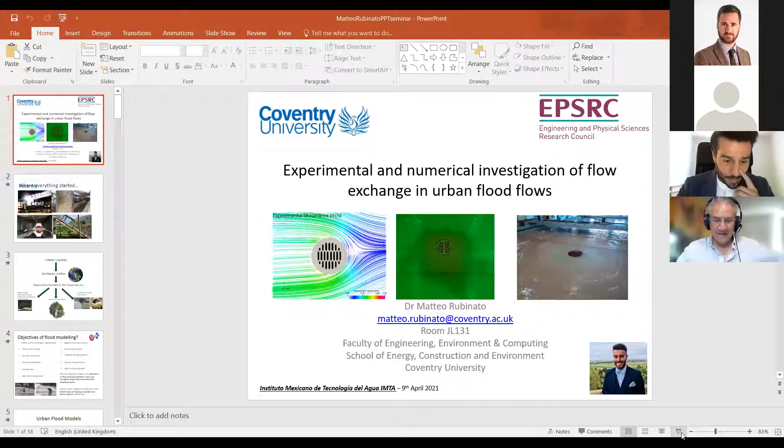Before I start with the presentation, I want to introduce myself and explain why I got this passion to become an environmental experimental modeler. When I was doing my master's studies in Italy at the University of Padova, the topic of my master thesis was building a physical scale model, 1 to 43, of a dam called the Dam of Morelli in Italy.

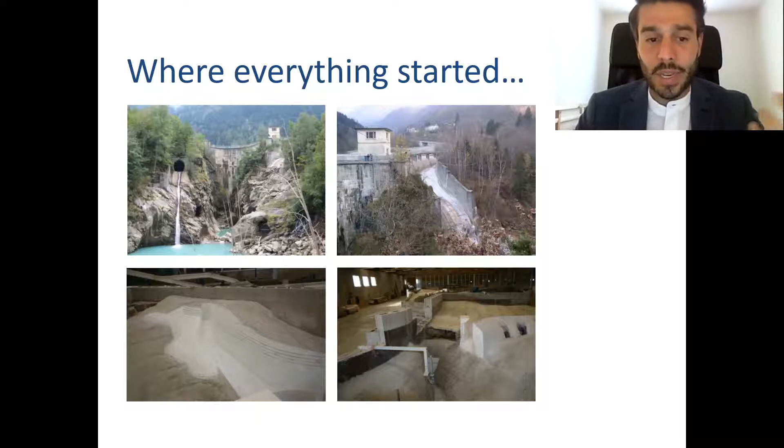There was a need to expand the capability for releasing a higher quantity of water, because sedimentation was happening in the reservoir upstream, limiting the storage capacity. During these years, finishing my master's in Italy, I got to know and work with leaders in Italy at the University of Padova, and that's where I got this passion for experimental modeling. Since then, I was able to continue and grow.

Today I will talk about the topic of urban flooding, shown in the image on the top left, which I'll describe in a few minutes. However, I've also been working on experimental models for river situations, studying the effect pollutants may have when dealing with vegetation on the sides of the river, as well as the debris flow you can see at the bottom right.

These projects are within universities in the UK, mainly Sheffield and Coventry University, as well as universities in China. The bottom left model is from Sichuan University in Chengdu, and the bottom right corner is one I've done in collaboration with a university in Beijing.

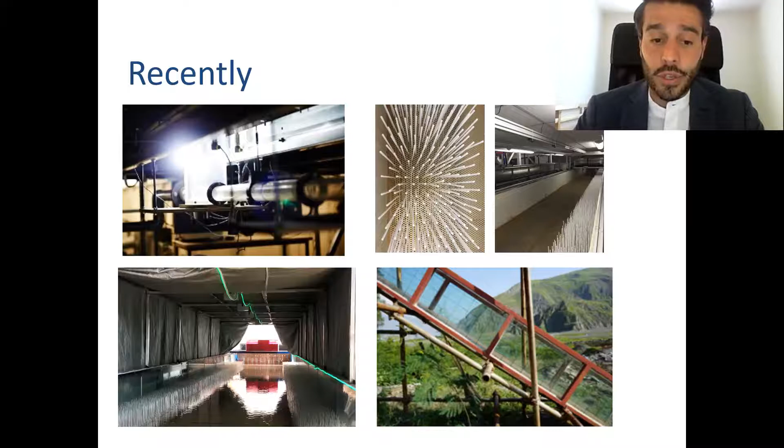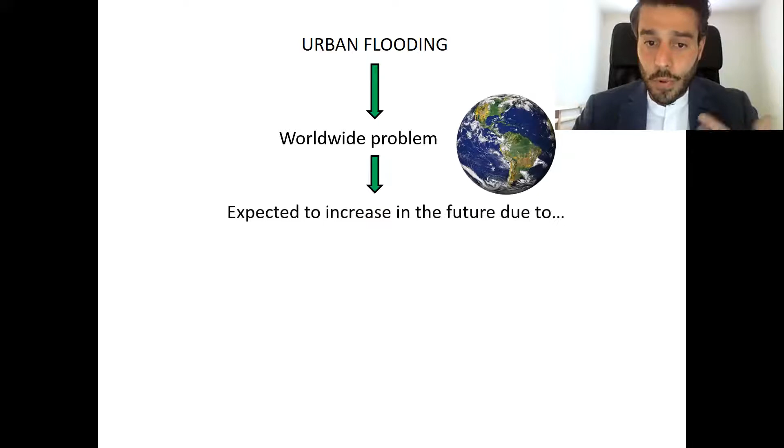So why do I think this is an important topic? Hopefully you will all agree with me. I think this is a worldwide problem, affecting not just a single city in Italy or in the UK, but many cities across the world. What's more important is that we expect this phenomenon to become more frequent in the future. When I talk about more frequent, it's because it can increase in magnitude, and also increase in frequency. This is due to three important aspects, the first being climate change.

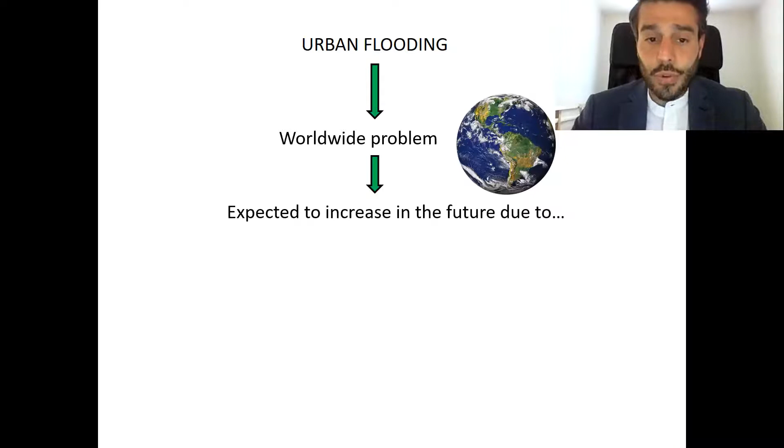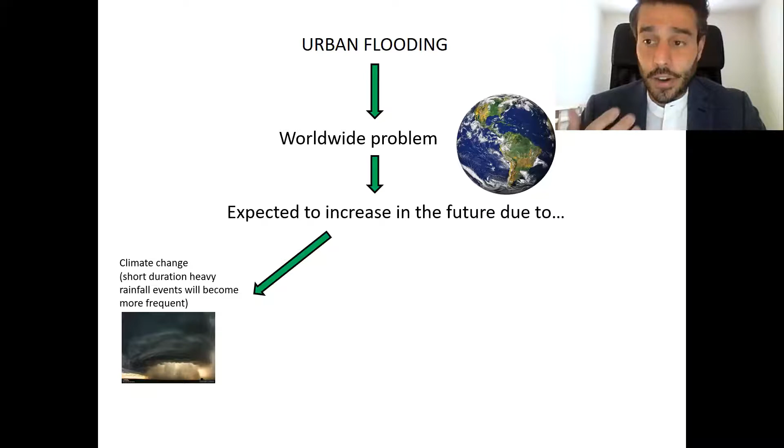We all know there are changes within climates across the world. The most important thing is that in certain areas, heavy rainfall events are becoming more frequent, and therefore they stress the existing sewer system.

The second aspect is the increase of urbanization. This is another phenomenon seeing a lot of people moving from rural areas into urban areas. When we think about that, and about existing sewer systems, we realize they've been designed with a lower capacity of water to be conveyed. With more people moving into cities, the systems are unable to cope with the situation, and therefore can lead to flooding.

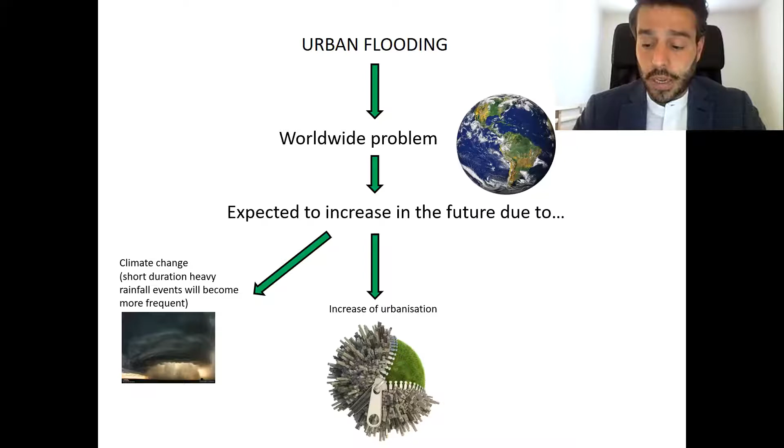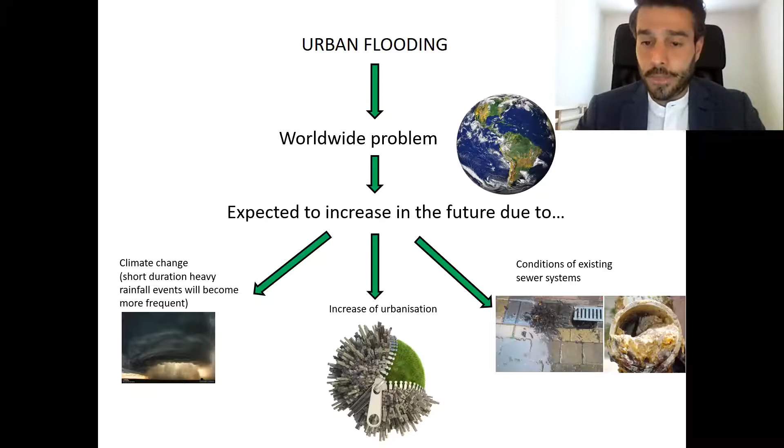When we try to predict urban flooding, engineers nowadays use numerical tools to identify and produce maps that can estimate the level of flooding and which areas are more at risk. This can be for designing new systems, producing hazard maps, systems for real-time management, as well as maps to contact rescue services and direct resources for better management of the situation.

If we look at each of these bullet points, what's very important is that they all deal with the interaction between what happens in the sewers and what happens on the streets. What's very important to state is that, compared to river flooding and coastal flooding, urban flooding is considered the hardest type of flooding to predict and defend against. So we're dealing with a level of uncertainty that is still extremely active today.

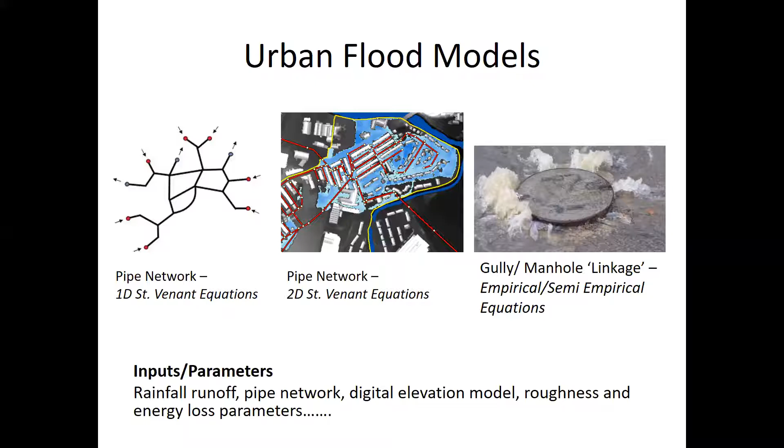Each of these incorporates a level of uncertainty that can lead to accurate or inaccurate results at the end of the simulation. So thinking about this, how can we make sure that whatever we test is extremely accurate? To do that, nowadays the only capability we have is using some resources.

However, due to the development of social media, we can see how many people are taking videos, pictures, or whatever you can think of during these flooding situations. These are often the only images or videos we can use to calibrate and validate our models. However, they're not extremely accurate, so there's still a level of uncertainty with it, and this will not lead to 100% accuracy of what we're trying to achieve.

When we think about all of this, we can imagine straight away that due to the uncertainty of urban flooding events, we do not know when the next event is going to be. And even if we did know, we may not have the resources to develop a system of equipment that can measure everything we need: flow exchange, flow rates in the pipes and on the streets, velocity profiles. All of this leads to a lack of data, a paucity of data, that makes it more difficult to rely on and trust these numerical models.

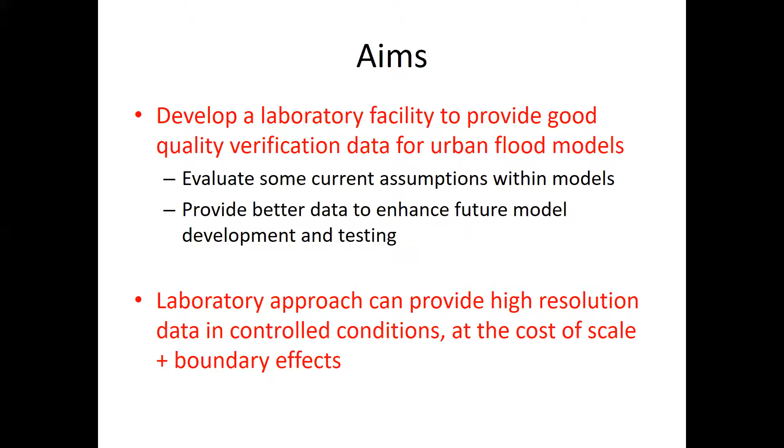And this is also in line with at least the strategies here in the UK. I will be very glad to hear about what the strategy is, for example, in Mexico.

But here, there are three crucial points that are directly in line with this type of research, because the government is trying to provide a better understanding of urban flooding scenarios. And there is a need to provide data that could be used to calibrate and validate numerical models, because they want to improve their accuracy. And all of this is targeting innovation for improving the development of new infrastructure.

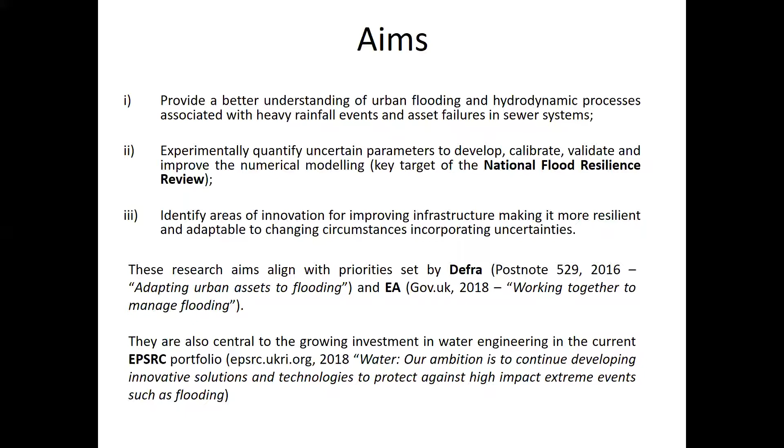And it's also, at the same time, linked with what we call the GCRF Sustainable Development Goals, because for each one of the categories that we have right here, and thinking about what I try to propose with my work, it's actually in line with 3 different Sustainable Development Goals.

So the first one is to try to target developments to build resilient infrastructure, systems that actually lead to a non-flooding scenario, or even to resilient systems that can deal with the flooding scenario. And we want to make cities more sustainable and also safe. And finally, we are definitely targeting the issues of climate change. So these are 3 important criteria that are in line with the research that I'm proposing today, that I'm providing all the results to you.

How did I do that? So I basically designed this experimental facility, which was built from scratch. And as you can see here in the schema, we have a sewer pipe, which is linked to an urban surface, which has a slope of 1 to 1000, via, in this case, a single manhole. This facility can also be expanded up to 6 manholes and 3 different pipes on the drainage.

But to go back to try to provide a better understanding, we had to start from the basic scenario, because you try to understand firstly how a numerical model works on replicating the basic scenario, and then you increase its complexity. As you can see from the model here, you can measure upstream and downstream the flow for the inlet both on the sewer and on the surface, as well as the outflow on the sewer and on the surface.

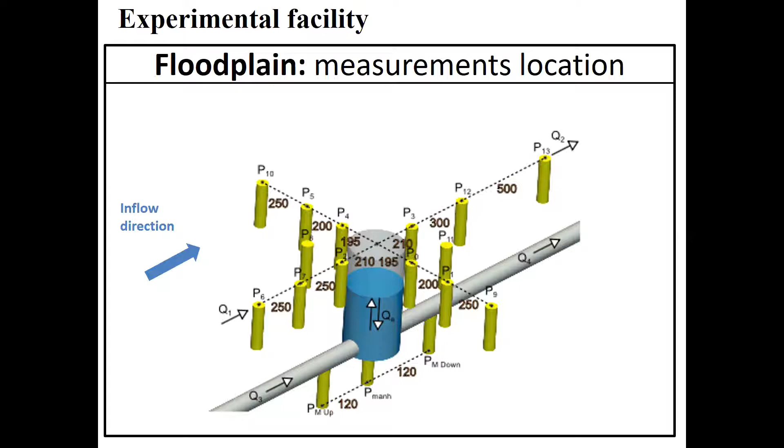We have along the system pressure transducers that I will show now in a second. And there are also a set of measurements on the top of the surface, which actually are very important to determine what is the water level that we have on top of the surface around the manhole when we have the flooding scenario. Here, there are some more images that can give you probably a better understanding about the model.

So the model was made in acrylic, and the choice was made because it is a material that is easy to deal with, to cut, and at the same time, it could enable the visualization of whatever was going inside the manhole. And you can see the example of the flow electromagnetic flow meter in blue, and the valve opening in red.

In this case, this flow electromagnetic flow meter had an accuracy of plus and minus 2.5%. And for the flow measurement, basically we conducted an interpolation between the valve opening and the flow that was generated.

And for the pressure transducers, we used the GEMS sensors, which had an accuracy of plus minus 0.72 millimeters. So we're talking about extremely accurate measurements. And below here, you see a view from the top of the facility, of the surface, which is 4 meters times 8.

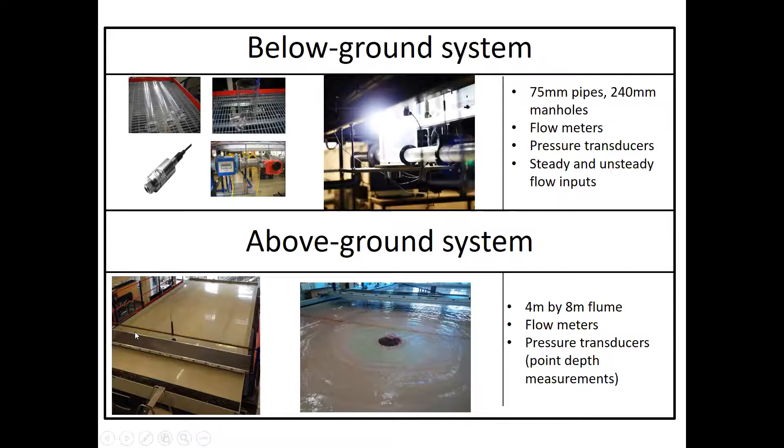At the moment, this is just the image with one manhole overflowing, but as I said, this could be expanded to other six manholes from previous studies, as you can see in my previous publication. When designing this, I needed to make sure everything I designed in terms of equipment could be measured and controlled in real time.

So I basically designed, using equipment provided by LabVIEW, a system of connections that could transform the electrical output of each piece of equipment into a specific value, which could be liters per second for the flow rate or millimeters of water level for the water depth around the manhole.

And this was the interface that I could see when I was doing my test. So I could see in real time the water level around the manhole, the pressure upstream, downstream, and in the manhole itself, the different water levels, and the emergency button for when I was stopping it, when I was flooding the lab, which actually happened a few times at the beginning stage of the test.

This is actually quite important, because when I did the calibration between the valve opening and the flow in liters per second, I wasn't just using a steady condition for my test, because if you think about it, a normal flooding event is actually an extremely unsteady situation.

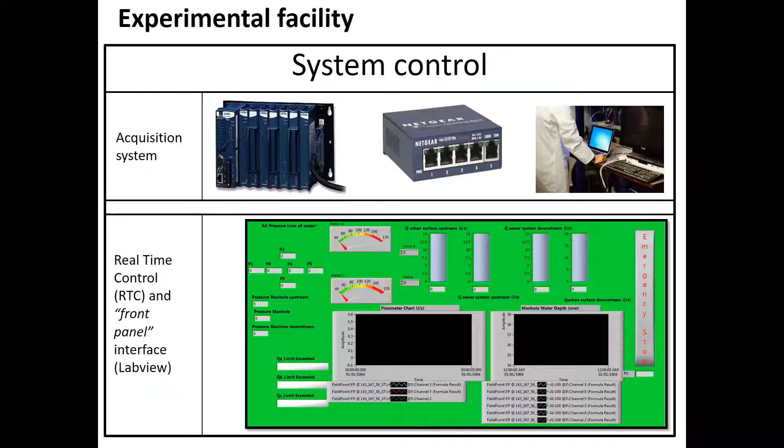So with one of my first publications, I was also able to take specific rainfall events, generate flow hydrographs, and then scale with a direct interpolation, using the same equation but reversing it from liters per second into the valve opening, and then simulating specific hydrographs within the facility itself.

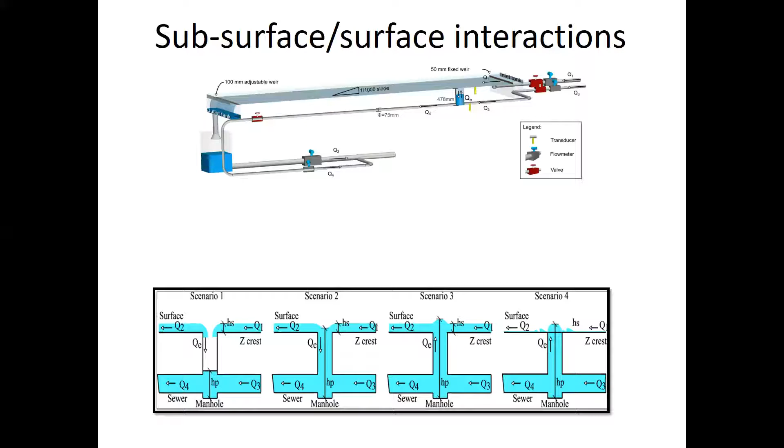In terms of what this facility can do, we have four specific scenarios typical of urban flooding. The first is the inflow into an unsurcharged sewer, which is more often called the free weir case, where water running on the streets enters the sewer, which is not overflowing.

The second is called the submerged case, where inflow again from the street enters the manhole, which in this case is almost starting to come out from the drainage system. And then we have the last two, which are basically situations in which you have an overflow from the drainage system, and you may or may not have a combination of this with water on the streets.

What was very important when I did my literature review was that these equations had never been tested for a specific configuration like this one. They've been taken for different applications, but they were never validated against specific experimental models that could combine the interaction between the two systems.

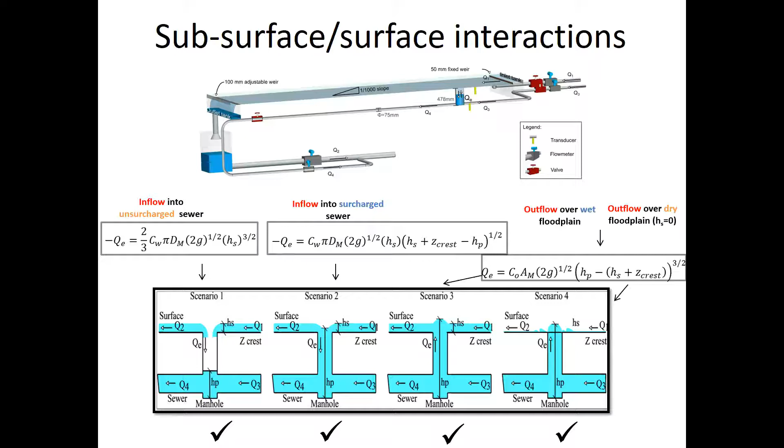As you can see here, some parameters can be expanded with more data attached to the paper, in terms of flow rates and flow exchange. But I always include the non-dimensional Froude number and also the Reynolds number in the pipe, because this gives people the possibility to upscale these results to a different system.

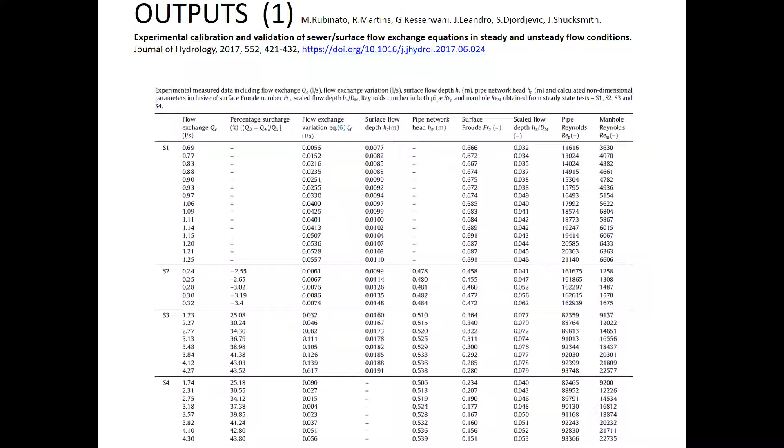Especially when they have a different relationship between water level on the surface and the diameter of the manhole itself. So to verify that validity, I ran a series of tests.

By looking at this equation, I didn't only validate those equations, but I also provided my coefficients in those three equations that I showed before, which can be used by numerical modelers when they insert those equations into their models. So they have a full set of data that they can use to fit those equations and validate the outcomes of their models against my experimental results.

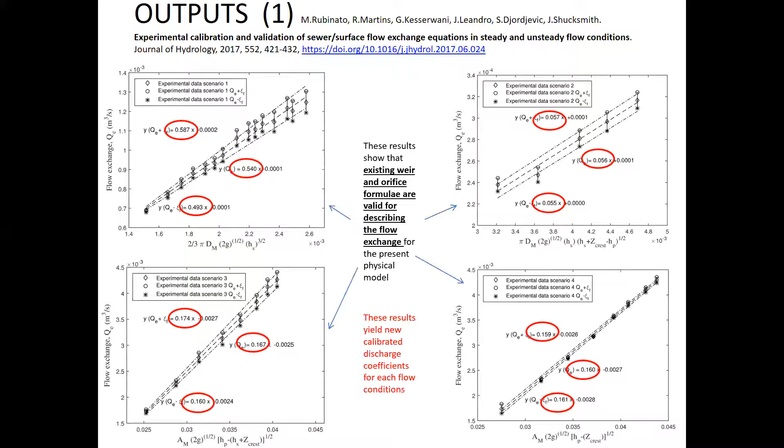So this was the first step. These were all steady tests. So I wanted to see how the model could actually perform if I was running unsteady tests.

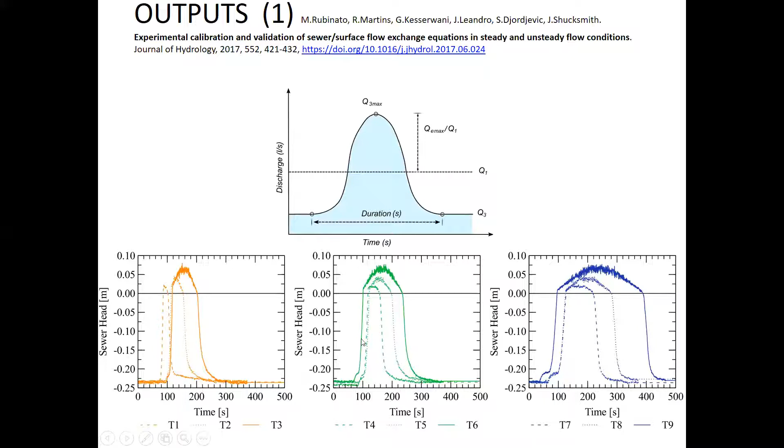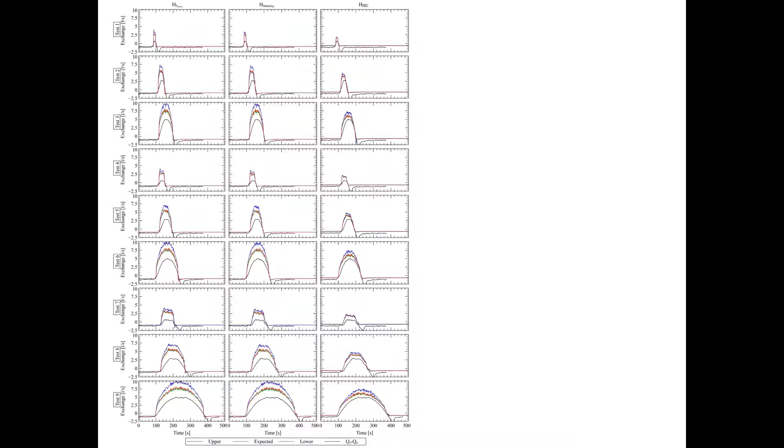As you can see here, I ran a series of tests that were increasing their duration. At the same time, we tested them against different conditions for the numerical modeling, which could use different values, for example, of water level on the surface, or the water level thanks to the equation of Manning, or even the water level using the manhole height. For each of them, as you can see from the graphs, the black ones are experimental, and you can see that every single configuration tends to overestimate the calculation of the flow exchange.

So keep this in mind, this is just one system with one manhole. Try to picture this: if you have to run a full city, how many other manholes there are, and how the level of uncertainty keeps increasing from one to another. So we're talking about producing maps that are actually much more confusing and less accurate than what it could actually be. This is something that I've recently experienced and wanted to expand with further research, and something else is under submission that I couldn't present today.

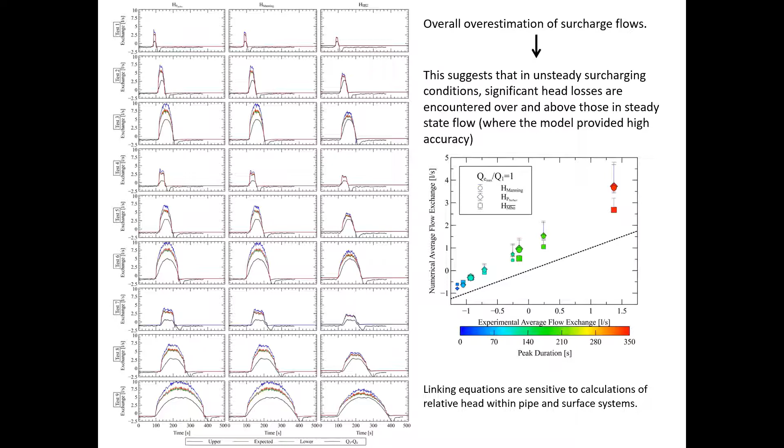The second thing that I wanted to focus on was that all the tests you saw before were made on the worst case scenario, when the manhole lid was removed due to the flooding event. However, this is not always the case, because there are situations in which the lid stays stuck to the manhole.

So when I was traveling around the world for conferences and for my holidays, I was not only taking good pictures of buildings and architecture, but I was focusing as well on different manhole lids. These are actually manhole lids that I took from different countries across the world.

And what I wanted to do was to see how, by changing those equations based on the void area where the water could enter due to the different shape of these manholes, I wanted to see how this could perform, if there was a difference between one and the other.

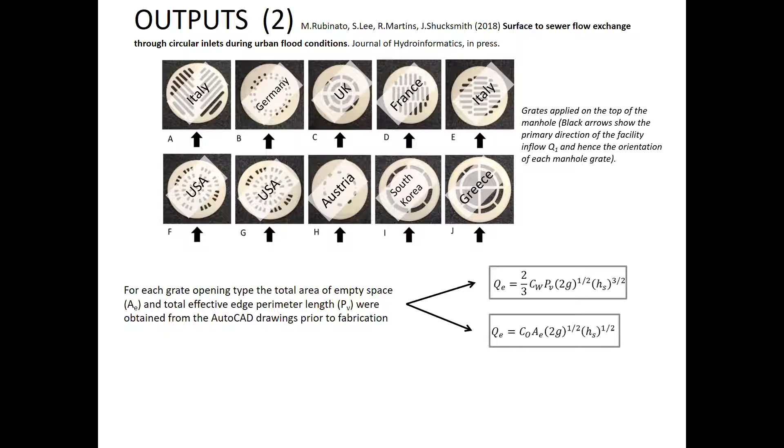So I took again my scenario with all the measurements across, and I was able to identify one point where the water level was not affected by the overflow of the water, or by the fact that when you have the weird scenarios, the water enters the manhole, it was not in a location where the crest was already decreasing. So it was unaffected by it, and it could be the perfect measurement to actually validate these equations.

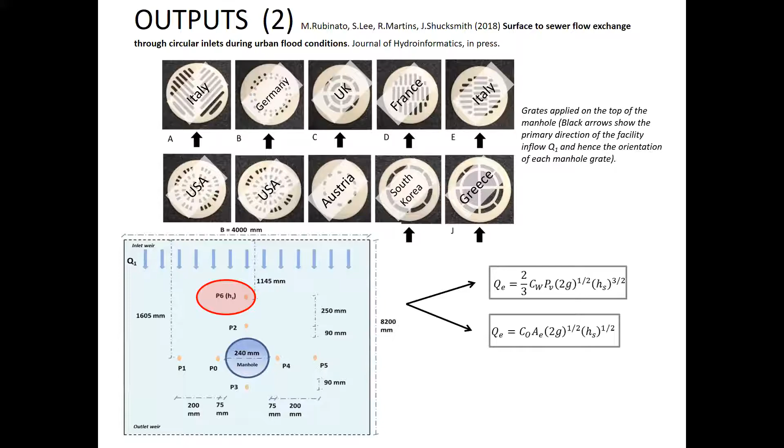You can clearly see already that they all produce a different water level. So upstream, the conditions may have a different water depth, which can alter the amount of flow that is exchanged between the two systems.

After further investigating this, I could find that grate H, which is the one you see in this figure, was the one that was enabling the least flow exchange. Probably this is obvious because you can see it's the one with the least amount of void area. However, the one with not the biggest amount of void area, which is grate A, still enabled a higher flow exchange than all the other cases.

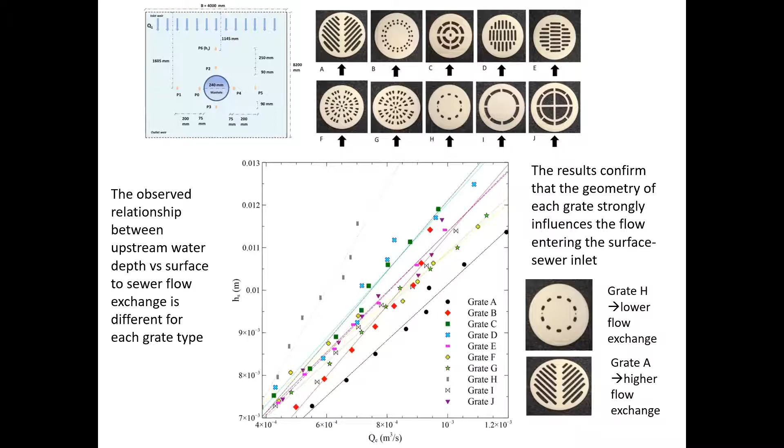This made me think that it doesn't only matter the empty space within the lid, but it actually matters the geometry and how the water is facilitated to enter the manhole itself. This made me think I need to investigate the velocity profile around these lids, because this can justify why I got a higher flow exchange there than in other situations.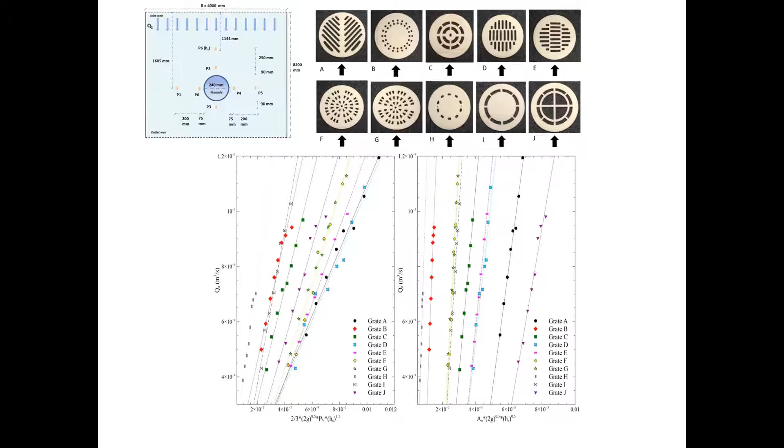When I did this, I also focused on trying to apply those orifice equations you saw before, and they were still validated even with different profiles. So they were still valid, and each of them got a specific set of coefficients.

Another parameter I needed to further investigate, as I mentioned at the beginning, is a part of uncertainty within numerical models related to energy losses. Within my literature review, I found that many people focused on this topic and did a lot of tests.

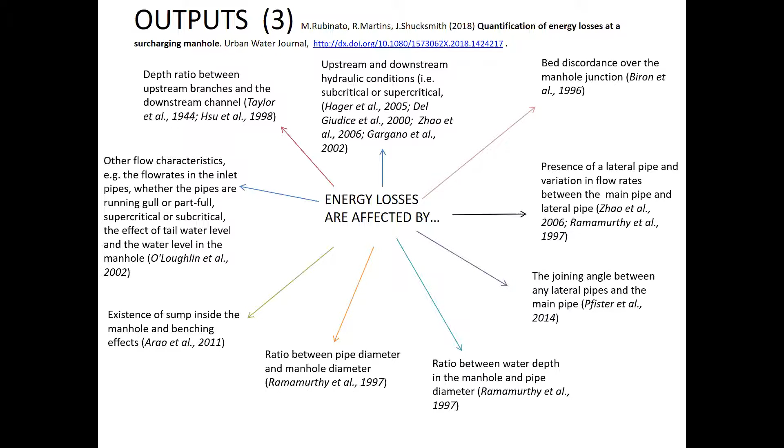They focused on different flow situations, subcritical and supercritical flow. They looked at the different geometry of the manhole versus the pipe, and how the angle joins from the pipe to the manhole itself. These were all extremely important studies.

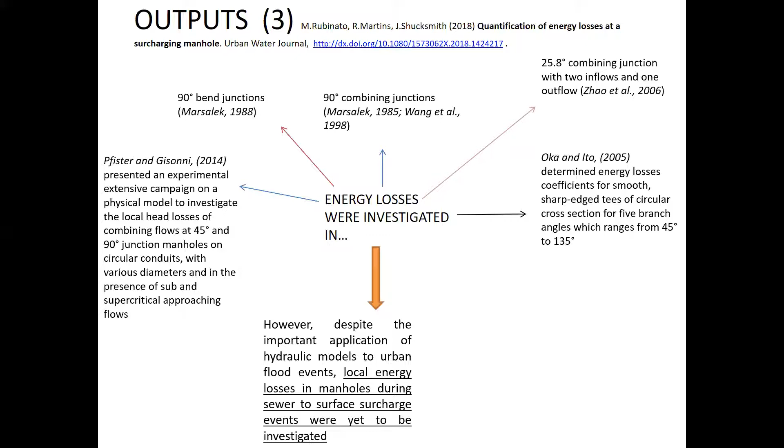However, when we talk about sewers and manholes, we still have a variety of tests that only focused on the sewer system, but none focused on the local losses during a flooding scenario. This was still yet to be investigated when I did this study. Without calibrating this parameter, we can never be sure about the results produced by numerical models.

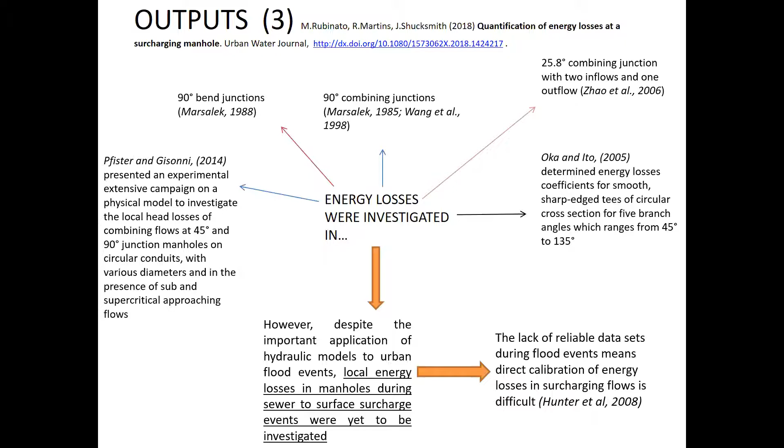So I ran a series of tests to test these conditions and estimate the energy losses for this facility. I introduced a lid which could fully close the manhole, enabling just a small stream of water to come out on the sides, as you'd normally see, and I could measure the pressure upstream and downstream of the manhole.

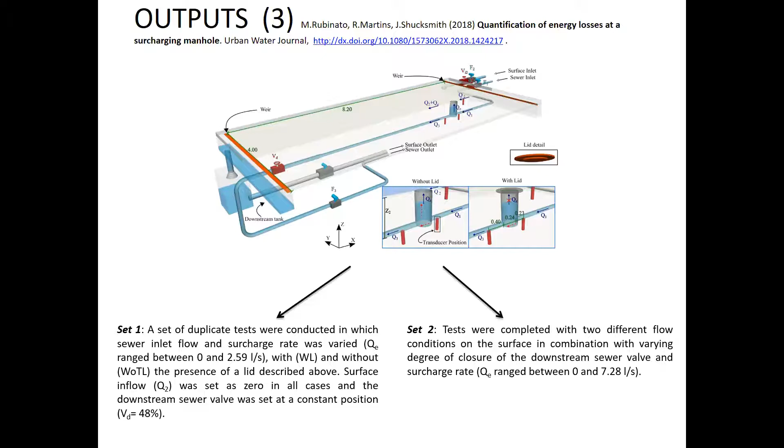I ran two sets of tests. The first was increasing the capacity of the flow exiting the sewer, tested with and without the lid on top of the manhole. The second series replicated an issue in the UK, a blockage in the pipe, and by increasing that blockage, I could see how water coming out would interfere with water running on the street.

To do this, I introduced a new method to estimate energy losses during a flooding scenario. Based on the mass balance between what comes in and what comes out, I focused on two streams: water that exits the manhole and water that follows the pipe. This leads to two energy loss coefficients, one for the exchange and one for what exits the pipe, and I rearranged the equations to find a specific coefficient for each stream.

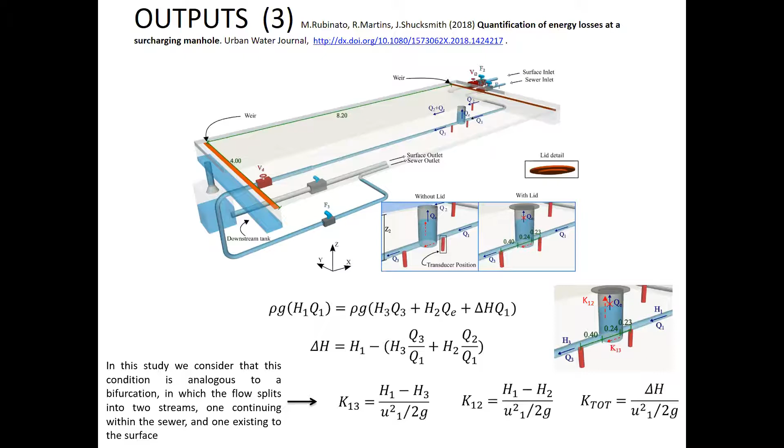When we don't have surcharge, it doesn't matter if we have a lid or not on top of the manhole, and this has proved absolutely fine. However, once we start having surcharge, the configuration without the lid shows a different set of energy losses than the configuration with the lid, which makes sense, because if the water is trapped by the manhole, it creates more turbulence as it tries to push and go out.

If we look just at the stream of water exiting the system, there's clear evidence that the lid has an effect on the energy losses. And when we combine the streams, we expect a scenario similar to that of the water exiting through the pipe.

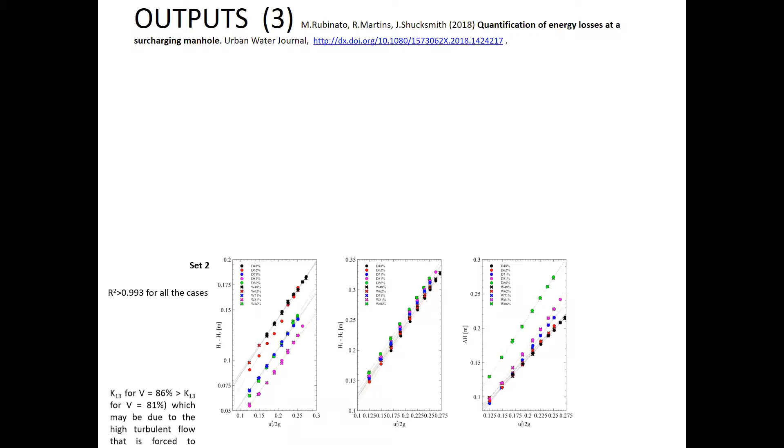For the second case, we blocked the pipe downstream to simulate a different set of pressures. Here again you can see three graphs; the first one follows the pipe.

Then you have the one that exits the manhole, and then you have the overall situation. As you can see on the first one, there is a trend based on the increasing of the blockage, which at some point is actually broken. That means we reach a level of turbulence inside the manhole, and by reaching that point, there is no more linear increase.

So something is so confused inside the manhole, so turbulent, so mixed, that it actually breaks that type of relationship. What's very important is that it doesn't matter how much blockage we have downstream of the pipe, the energy loss associated with what exits the manhole doesn't have any specific modification based on the amount of water on the surface. As you can see, we have a range of linear interpolations that are very similar and within a close range.

So this is actually something that, if taken into consideration in advance, can reduce the uncertainty.

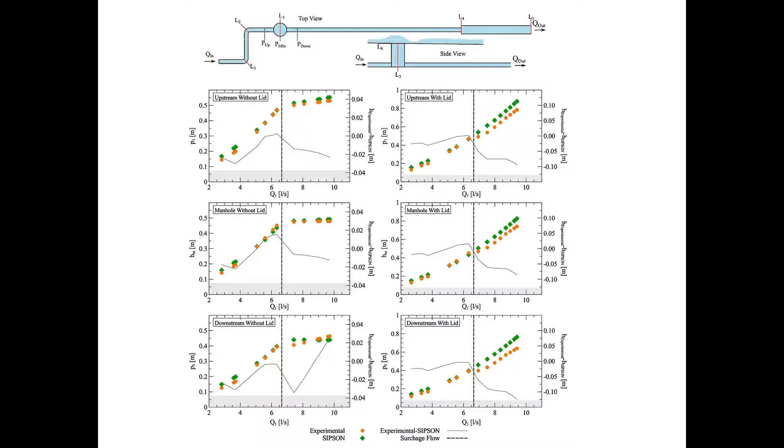We start seeing, however, a different situation when we focus on the overflow scenario. Especially when we have a lid, which is a typical scenario we'd expect, this leads to an uncertainty that was once again demonstrated to be present in numerical models. So with all my studies, I continue to show what needed to be taken into account and what could lead to more accurate results in the future.

This is another study where I focused on how well the numerical models replicated the flow exiting the manhole. These are all screenshots where we increased the ratio between what was coming out of the sewer and the flow on the surface, and the red dots are where the measurements were taken.

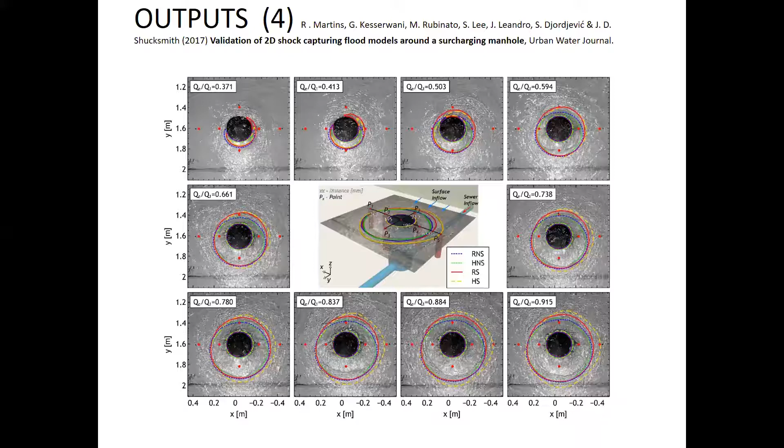You can see how we start from a crescent moon shape of the area of transition from supercritical to subcritical flow within the manhole, and now we almost arrive at a fully developed circle, which can be similar to almost a quadratic shape based on the assumptions we had with the numerical models.

This is just a visualization, but also in terms of results, you can see there are still some limitations based on assumptions about how the pressure, especially upstream and downstream of the manhole, could be present in the numerical models.

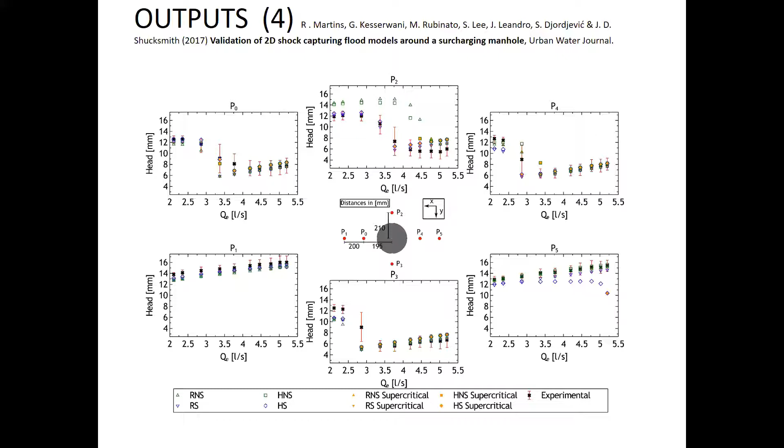And this is important because these are the parameters we would use to estimate the exchange between the two systems. Once I did all these tests, everything I talked about so far was based on focusing on the flow conditions and on the hydraulics of it. However, if you go back a few minutes, you remember I said I wanted to focus on what was happening in terms of velocity conditions.

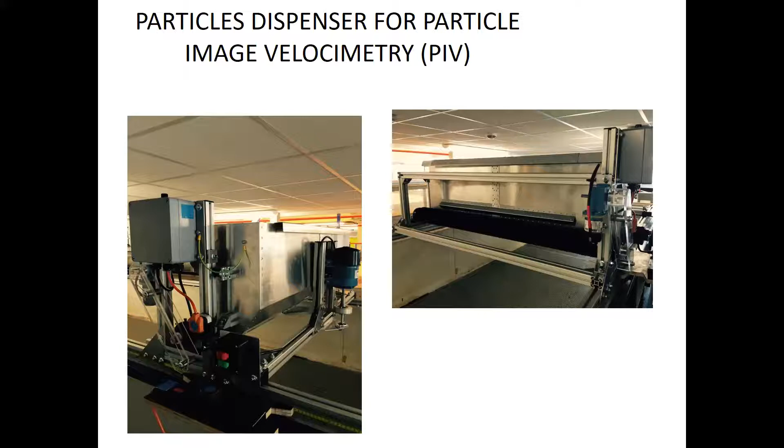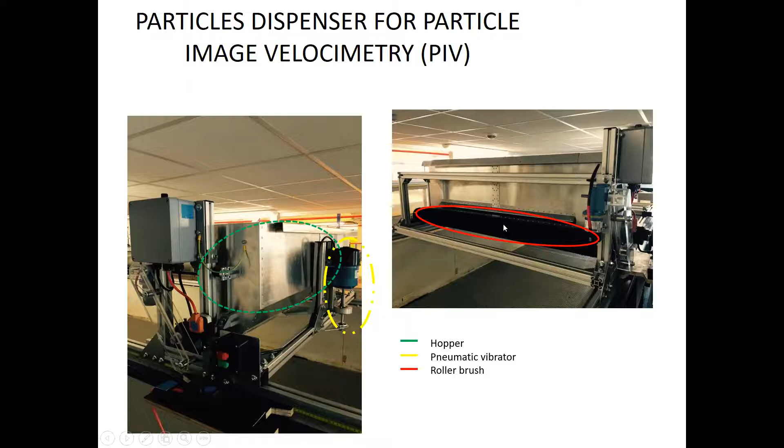So I designed this system. This is basically a particle dispenser. There is a hopper here, and it contains PVC particles, and this pneumatic vibrator basically shakes the box. So the particles move towards the bottom side, and this roller brush releases them into the system, as you can see here, released steadily within the system.

And then, of course, I had to design a system to collect the particles before they were recycled. I did this so I could develop a system of cameras which could record in real time all the videos I was making, enabling me to analyze step by step each movement of the particles from frame to frame to design the velocity field.

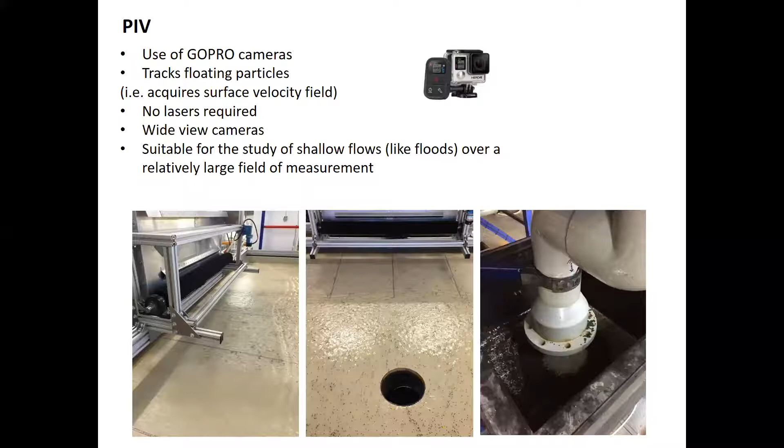I used GoPro cameras because you don't always have huge availability of resources for research, and they have demonstrated to be actually very good. So I need to calibrate them because they have a fisheye effect.

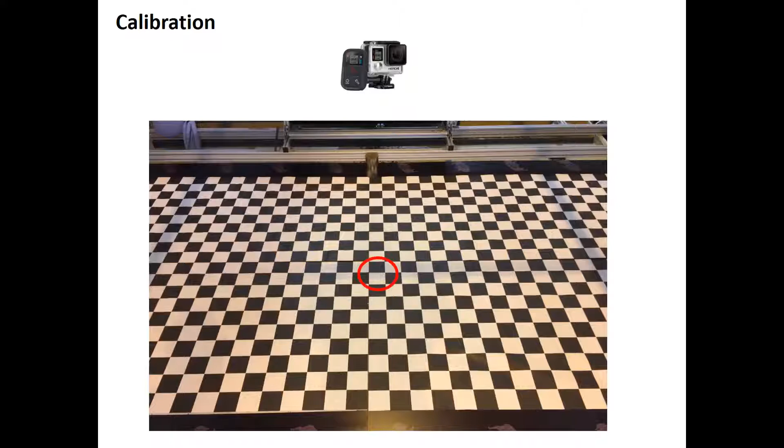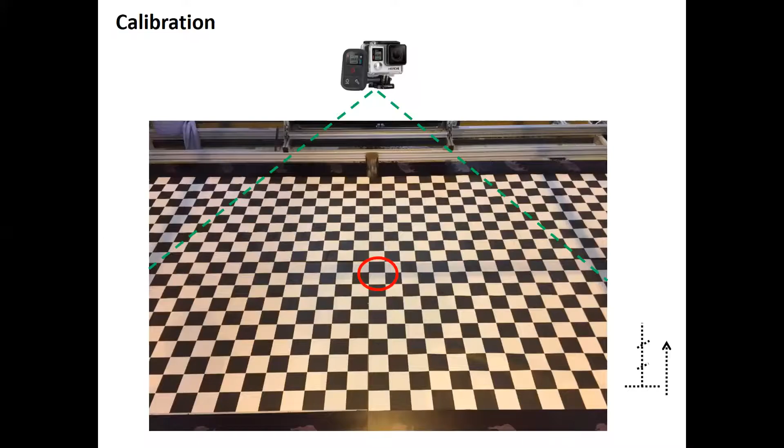So I use this checkerboard here at the bottom. And once I have a full view of the system, I have to repeat this from water level to water level. This is the image that a normal GoPro camera will give you, and you can see this fisheye effect with the curvature on the side.

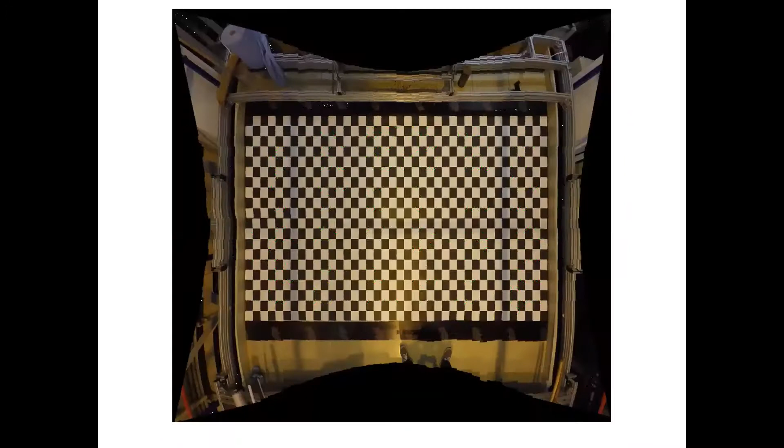However, by implementing some algorithm with a MATLAB function, I could dewarp the image and then crop it to make exactly the same platform as if it was straight in front of me, without any curvature.

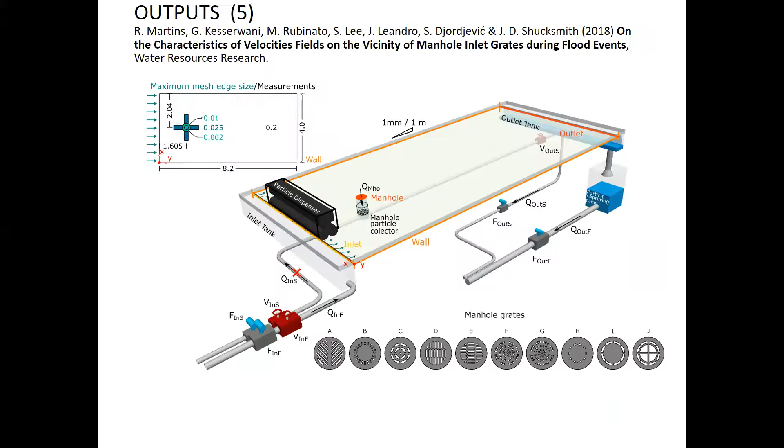Once I did that and designed the system to collect this data, I tested all the lids again, and I was able to not only verify experimentally and numerically the quantification of flow exchange, but also produce, for each of the lids, a full set of maps for the velocity field around it.

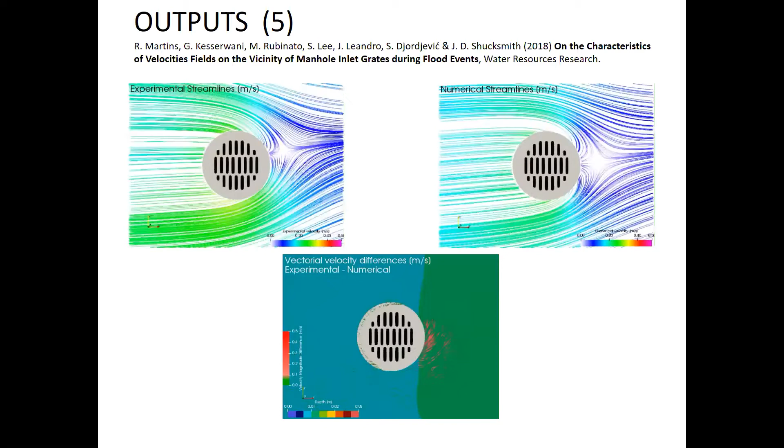This helped us justify why the water was entering more easily for specific manhole lids than others. This data is shared in another journal paper that is mentioned above here.

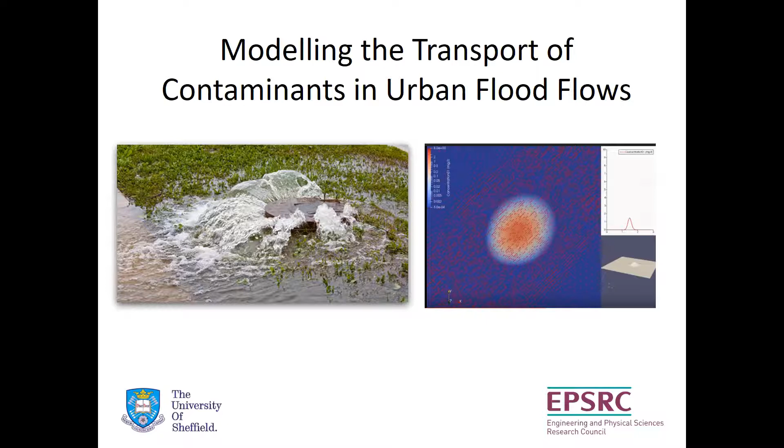After all of this, I wanted to keep building on the results of this facility, and move into a topic that so far not many people have actually tried to deal with: the modeling of the transport of contaminants in urban flood flows.

When we talk about this, of course, I found literature review mentioning this issue, and plenty of newspapers that were actually referring to it.

But what actually gave me the inspiration was when I went to a conference, the ICUD in Prague in 2017, and one of the keynote speakers talked about this issue, because there was a need for calibrating and validating models also for pollutant transport.

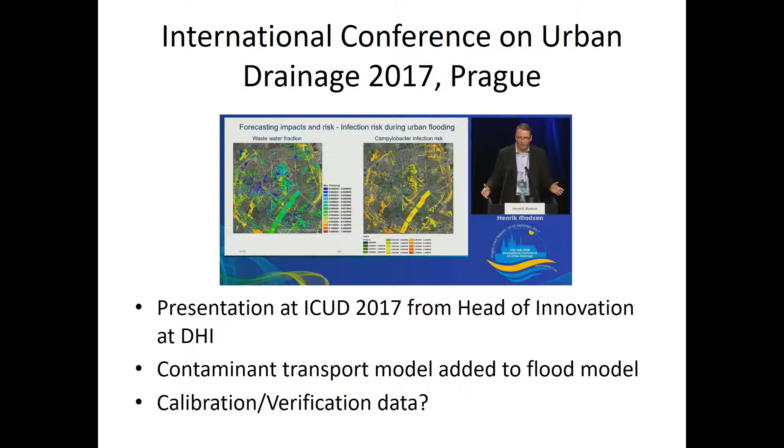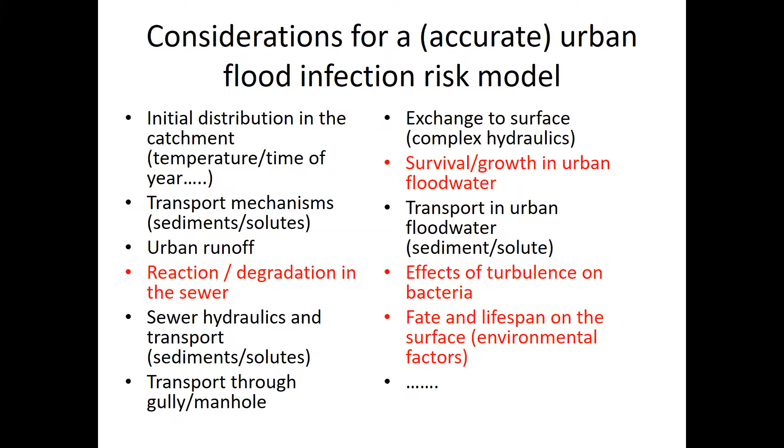To do so, I had to improve my facility again. I had to find a way to release a tracer that was definitely not a hazard for the university regulation, and could be easily tracked.

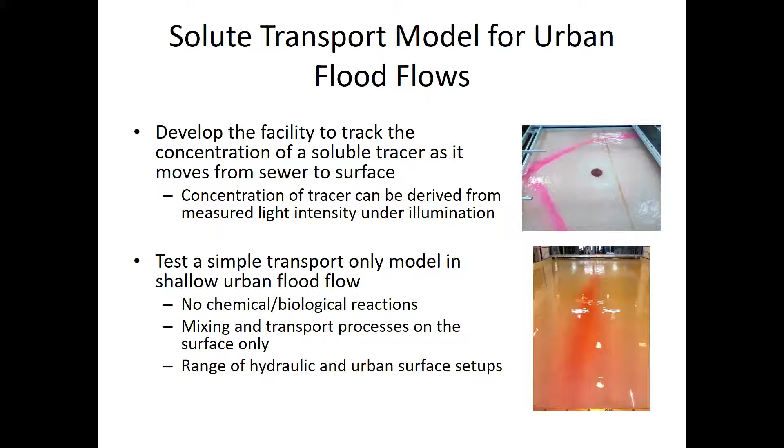I basically focused on using rhodamine, this dye, and I tried to characterize how rhodamine can become more fluorescent if exposed to green light.

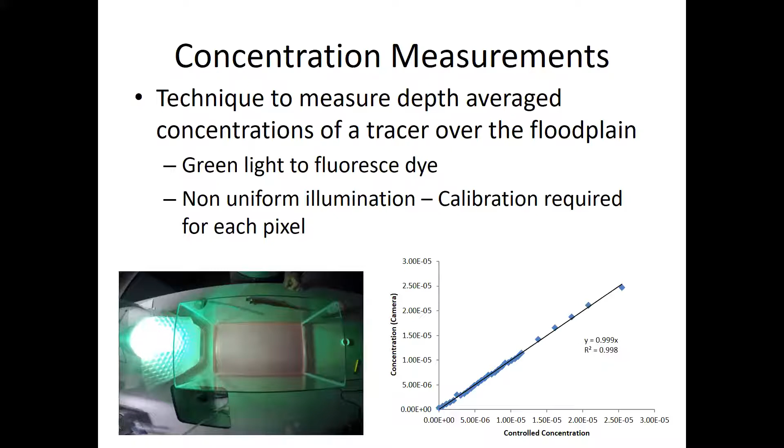When I realized this with a similar short test, as you can see on the bottom left here in the lab, one of the first outcomes was on the left-hand side: the experiment with this dye mixing with the water, and how by applying the calibration a numerical model would work. I basically applied it to my system.

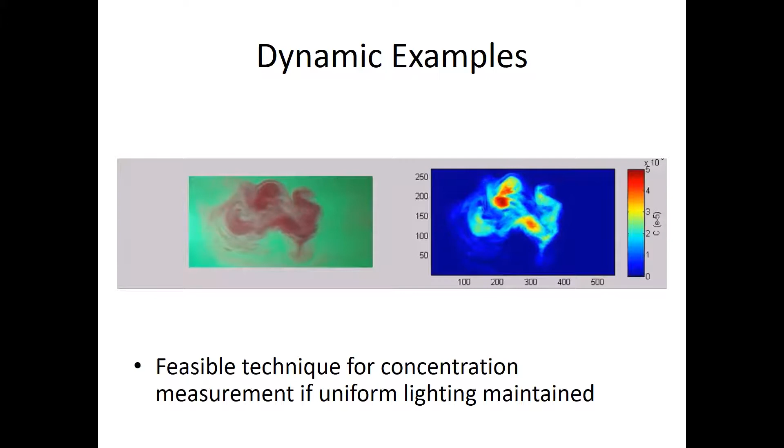So I covered the entire surface with green lights, and used non-reflective sheet to avoid any reflection from outside external light. Those reflections you see here due to the lights have been taken care of by being removed with the calibration. And I replicated all water levels in this facility.

For each water level, I added a level of pollutant to give me all the concentrations I would expect within the test. I had to mix 4 times 8 meters for probably more than 50 times, so you can imagine how long the calibration was.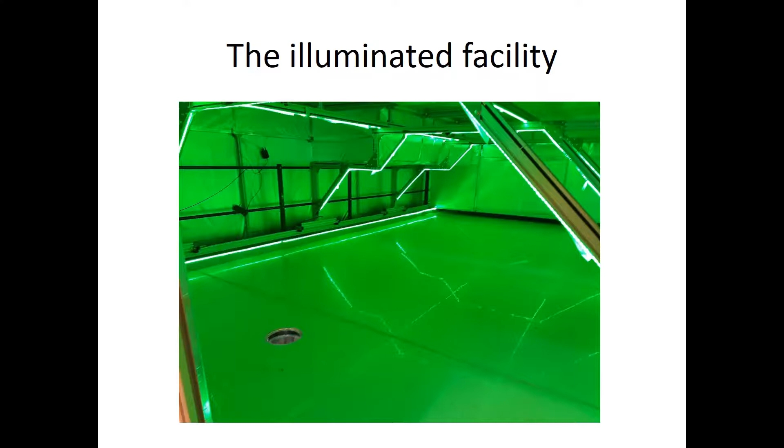Once I did the calibration, I also adapted the facility to inject rhodamine into the pipes. I have a tank downstairs which fully mixes the dye with water, then feeds the tank at the top, and by gravity feeds into the pipe.

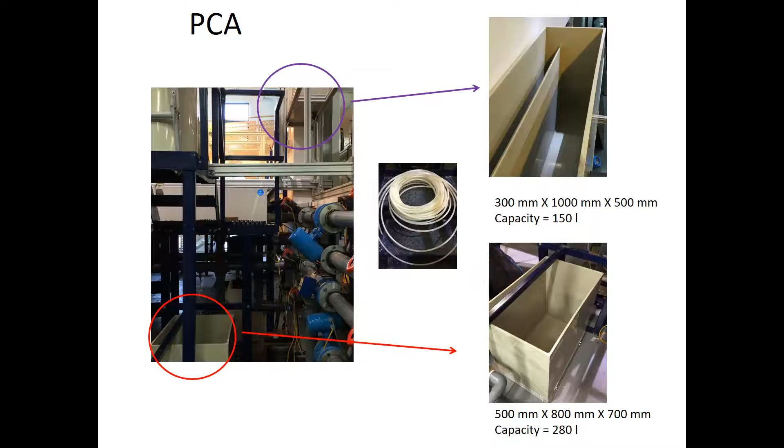At the same time, I can release not only the water, which I can change in and out, but also the pollutant that enters the system, so I can have a steady injection or an unsteady pulse. This is very important, because at this stage the facility can do basically anything.

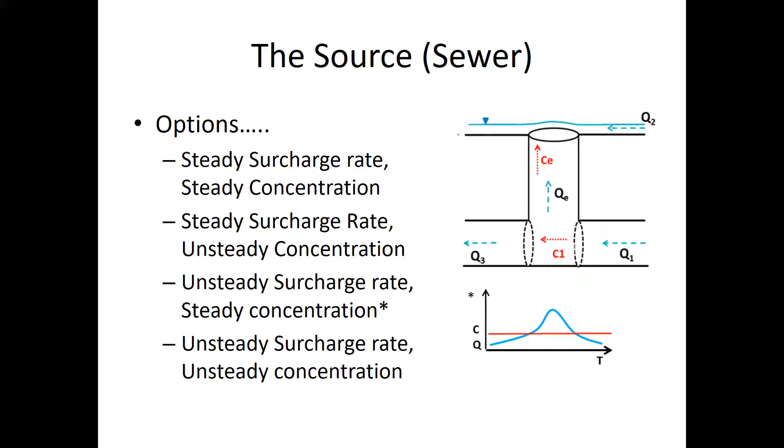And I also wanted to increase even more the complexity of the facility, by actually replicating different street profiles on top of it.

With a 3D printer, I was designing these plastic boxes, and the pipes you see here are all connected because with a vacuum pipe, I was taking the air off so that they could be stuck in the facility and not move with the water. At the same time, once I released the pressure, I could move them and shape them as I wanted.

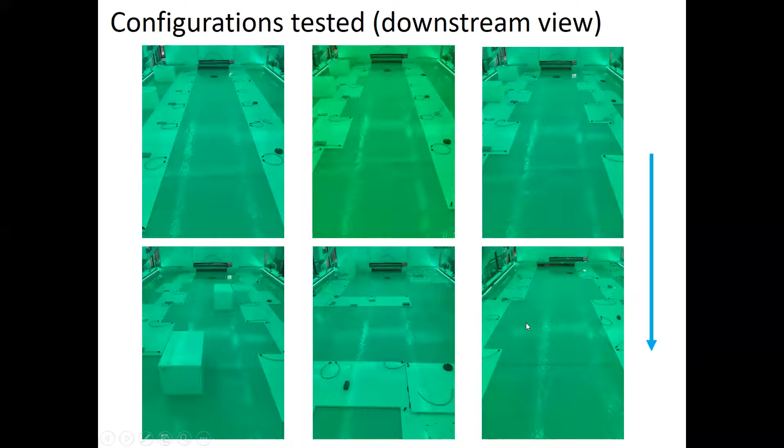This was important because I could not only provide the flow exchange, but I could also provide maps in terms of pollutant transport. So these are some tests that I did: you can see a normal rectangular street, a street with parking slots on both sides, cars in the middle in a meander situation, and one with the manhole on the side of the street, shown also from the top.

What I did here is just a preliminary set of tests, so they are just at a phase where I will test it even more. On the left-hand side is the experimental model recorded by the GoPro camera, and on the right is the numerical model, which still needs some tweaking, especially in the zone where there is intersection between cameras. But it shows how you have the spread of the pollutant along the surface.

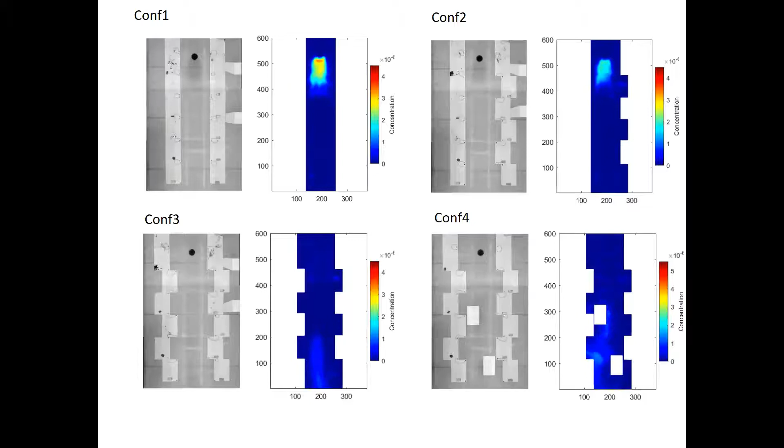This is a full set of data that not only provides the hydraulic conditions, but also provides, for each single point in the facility, the concentration of the pollutant—a full set of transport pollutant maps that can be used by numerical models. This was done not only for those, but also for the full six configurations.

What is very important is that, as I said, this is just something I'm working on at the moment, so you can clearly see there are still some inconsistencies I need to improve. However, there are already some scenarios that help us identify which typology of parking slot or location of the manhole could cause the dye to go from one side to another, as you can see on top here. This is also dependent on the flooding conditions.

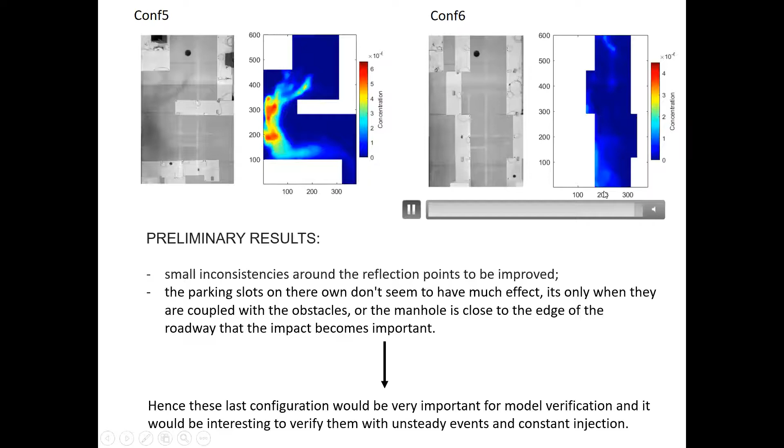The idea is to continue. I have collected more than 250 tests now, which are all under analysis, and to continue producing all these different scenarios, because numerical models should be able to be tested and validated against the easiest scenario—normal flow in the pipe with no flow exchange, the situation with flow exchange from the surface into the sewer, and the one with overflow.

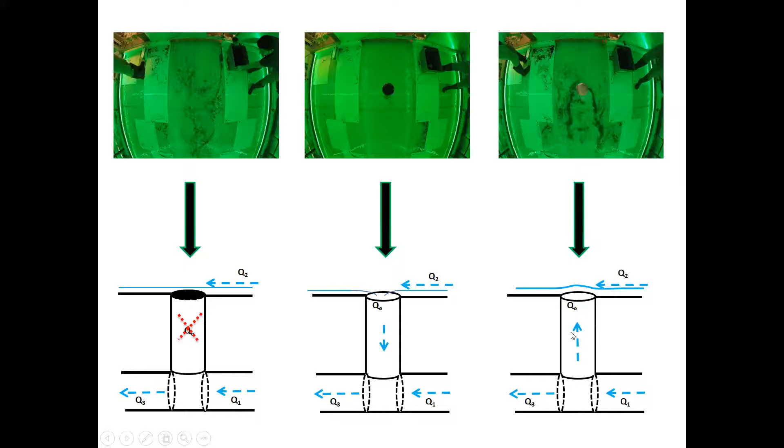If a numerical model can do that from a hydraulic point of view, but also in terms of velocity profiles and pollutant transport, then we will be able to calibrate the ADE equations and improve the accuracy of numerical models.

This will have a long-term impact in terms of how we can produce better maps for better health for the humans living in these areas, because we need to identify where the polluted water goes—it makes a huge difference if it goes in the middle of nowhere, or if it goes where there is a playground where kids could be affected by it.

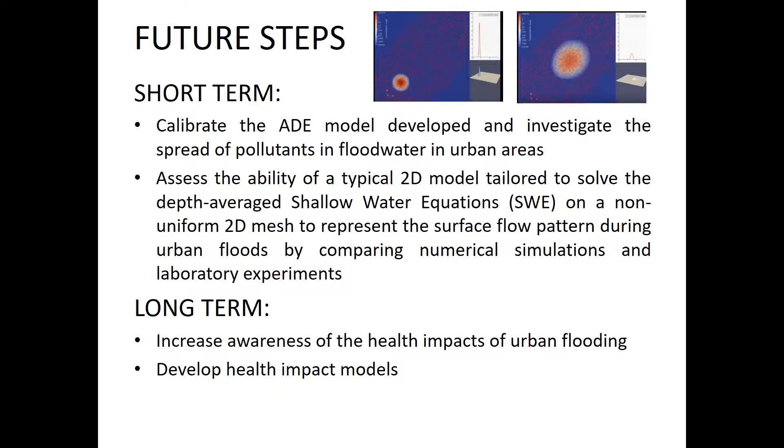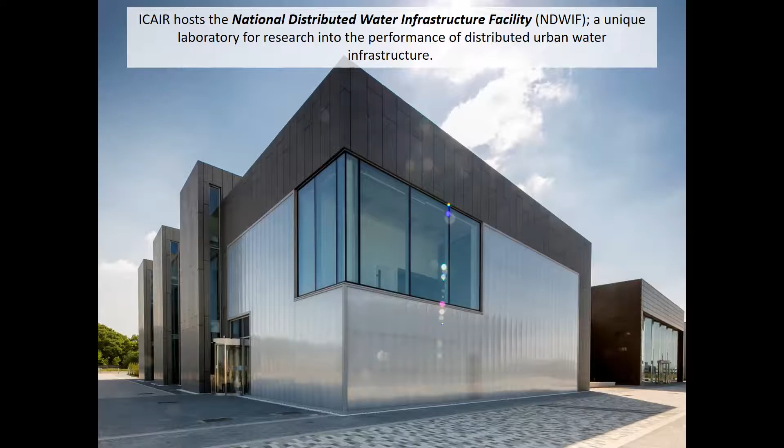Just to finish quickly, this was a full set of tests done with a scale facility. But I'm now collaborating with two institutions: Sheffield University, which has the capability of using one of the seven national infrastructures in the UK, called ICAIR. This is basically exactly what I showed you in a scale model, but at full scale.

They also recently won a European grant, so I would be glad to welcome anyone interested in this topic if you want to write some proposals, and we can do it together.

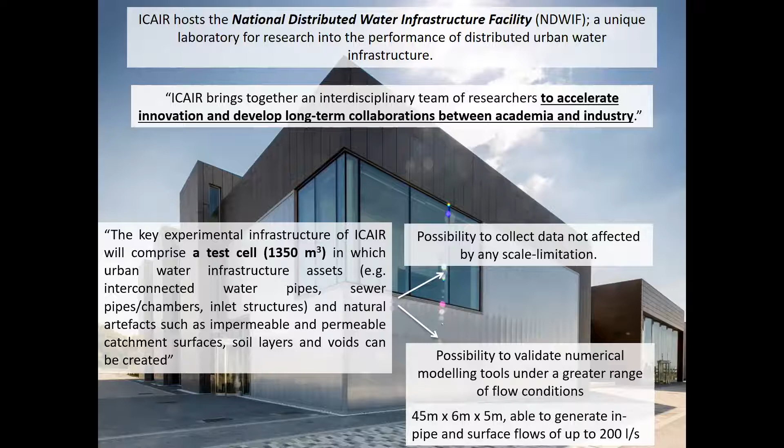At the same time, I'm also one of the research fellows designing this facility at IKT, the Institute for Underground Infrastructure in Germany, in Gelsenkirchen. This is another full-scale facility that will be used to replicate the full series of tests I've done at scale, with a full-scale scenario and the additional combination of rainfall on top.

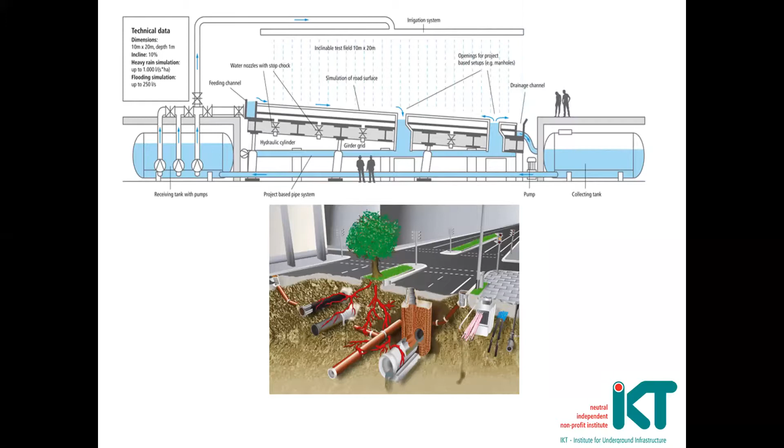It sounds very good, because actually we could run different configurations with different systems and combine them. So it would be very good to do.

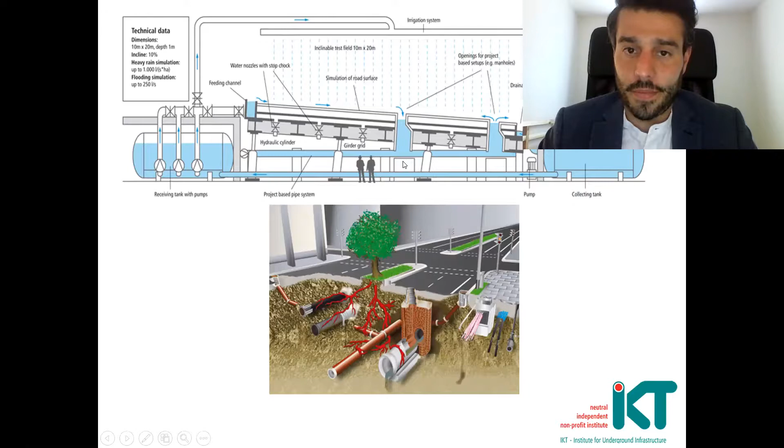On the contrary, thank you, Matteo, for your presentation. It was excellent. There are many comments about your presentation, and congratulations. It is great to have this opportunity to find possibilities to collaborate with you. It would be great. Thank you very much.